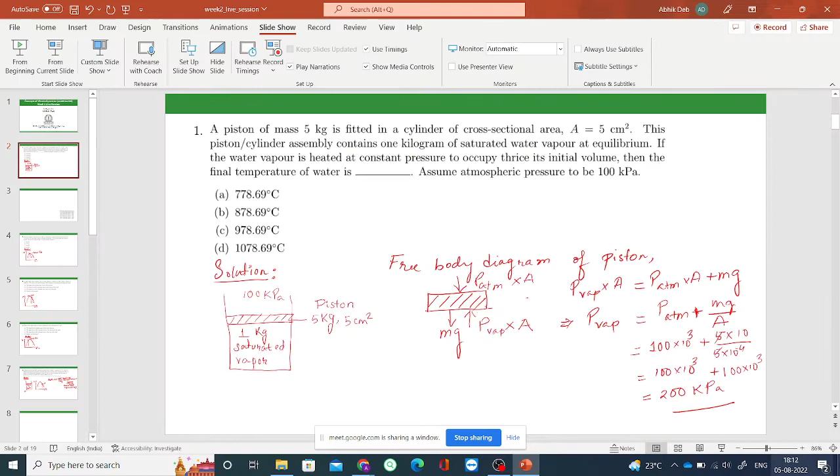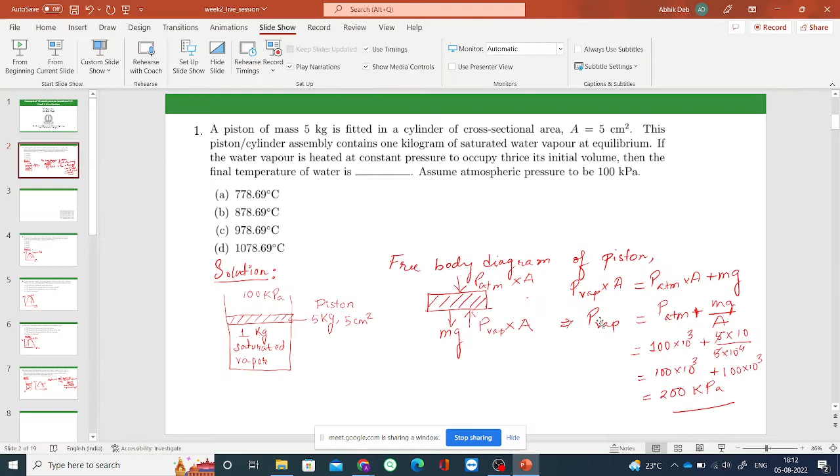So the net pressure inside will be actually 200, this is 200 kPa. So, see, in this only saturated vapor is present, right? So there is no liquid. So the pressure inside the piston cylinder, which is being exerted on the piston, is actually solely due to the saturated vapor that is inside.

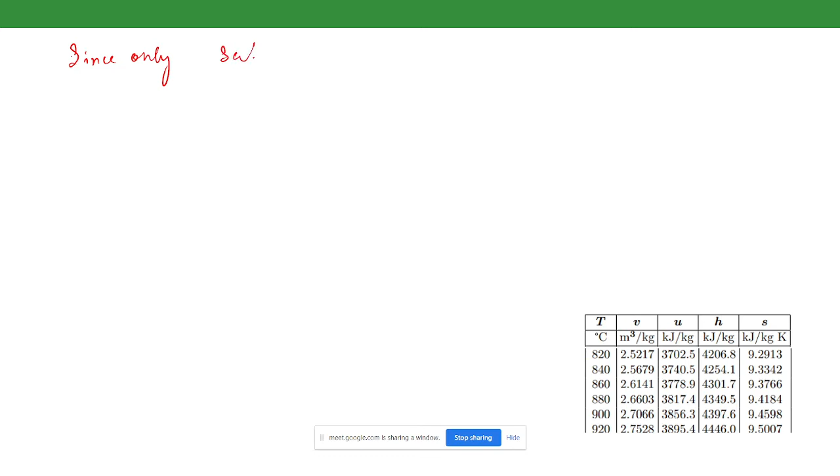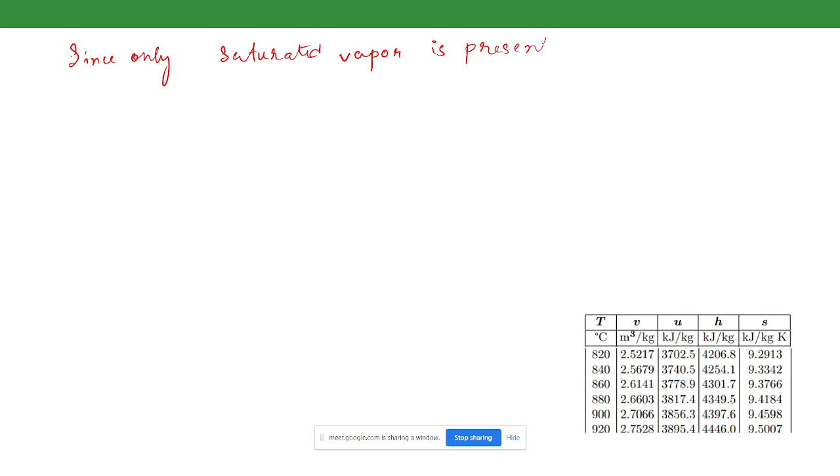So we can say that in this condition, since only saturated vapor is present, this saturation pressure will be equal to the vapor pressure that we have found, and that becomes equal to 200 kPa. Now corresponding to this saturation pressure, from the steam table we can find out the specific volume of the gas. Since this is only vapor, only the specific volume of the gas will come.

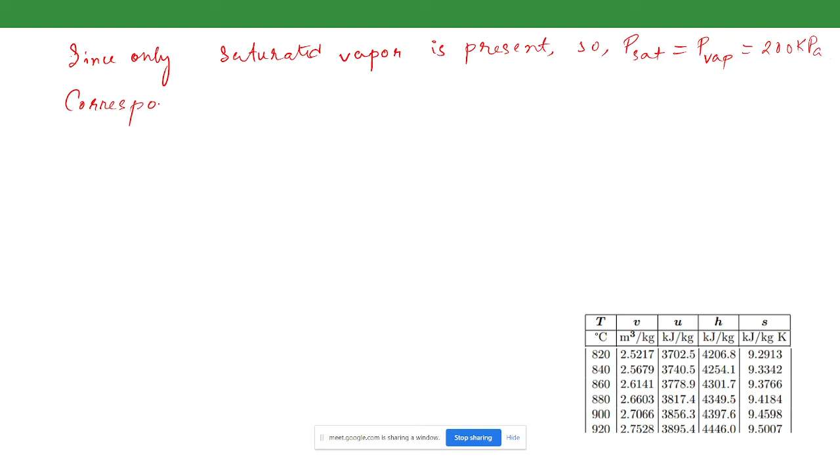So corresponding to P saturation equals 200 kPa, the specific volume of the gas, from the steam table, I am directly writing the value here, will be equal to 0.88568. Since only vapor is present, this will be equal to the specific volume of the entire mixture. So in stage 1, the specific volume of the mixture will also be equal to this one.

Now see, the piston cylinder assembly is a closed system. So for a closed system, the mass is constant. Since mass is constant, see, specific volume is volume by mass. In the question it is given that the water vapor is now heated at a constant pressure to occupy thrice its initial volume. So the volume is becoming thrice.

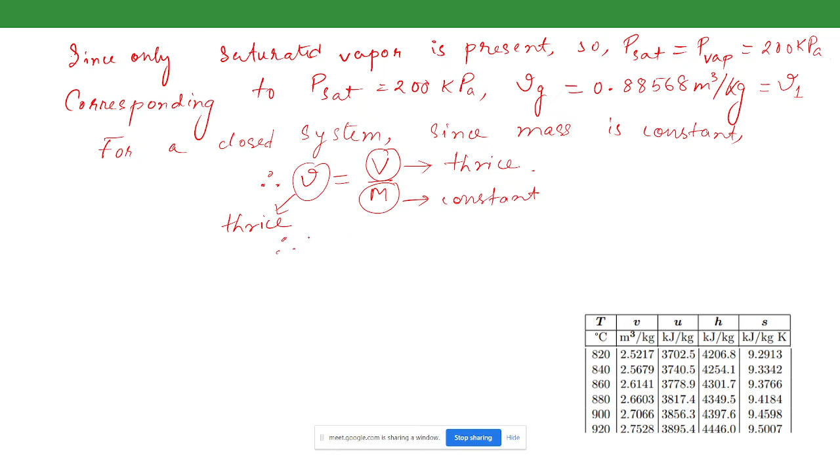So that implies that this value will also become thrice, right? Since the volume is becoming thrice and the mass is constant, the specific volume will also become thrice. So in stage 2 the specific volume is equal to 3 times the specific volume in stage 1, that is 3 multiplied by 0.88568, which becomes equal to 2.65704.

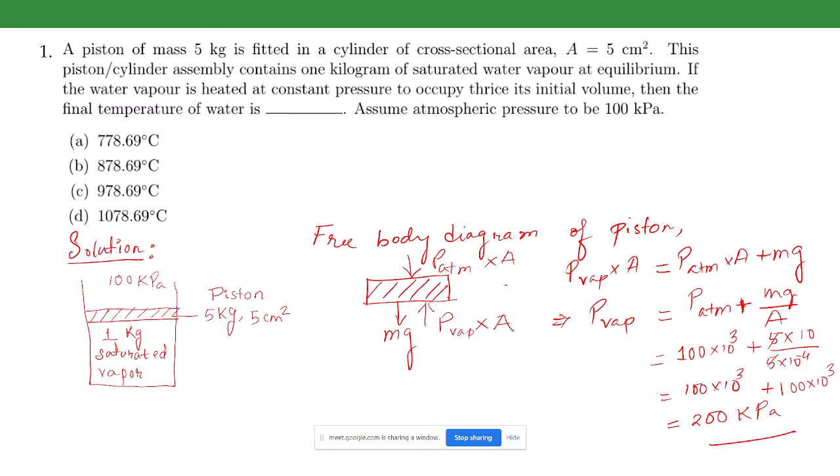Now we have to find the final temperature of water in this case. It was already in a saturated vapor stage. Now it is being further heated at a constant pressure, so it will come to the superheated vapor region. There, corresponding to this pressure, we have to find what temperature corresponds to this specific volume. From this section of the steam table, you can see that it lies between these two states, between 2.61 and 2.66.

So from the superheated vapor table, we have to find T2. Since there is no direct value, we have to do interpolation as usual. So T2 will be equal to, 880 minus 860, these are the temperature differences. Now we consider the ratio of the specific volumes, that is 2.65704 minus 2.6141, divided by the difference of the specific volumes corresponding to these two temperatures,

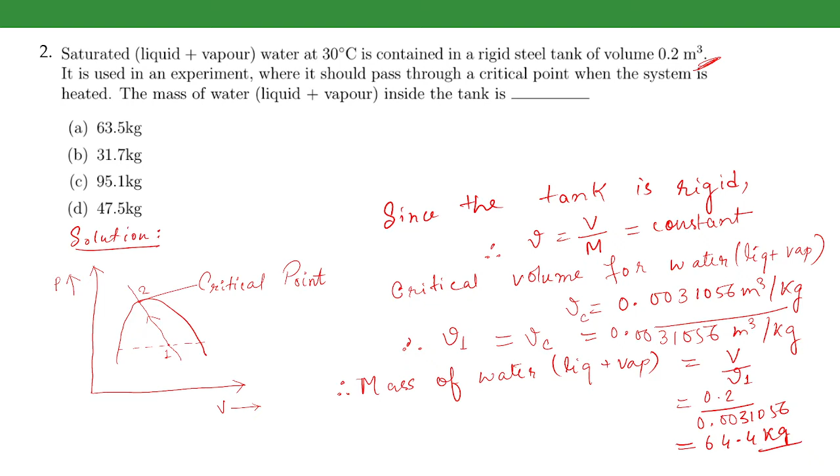There is a slight change in the value because the source from where I have taken this question probably used some other steam table. These slight changes are attributed to small differences in the steam table values from different sources. So the answer will be option A, 64.4 kg.

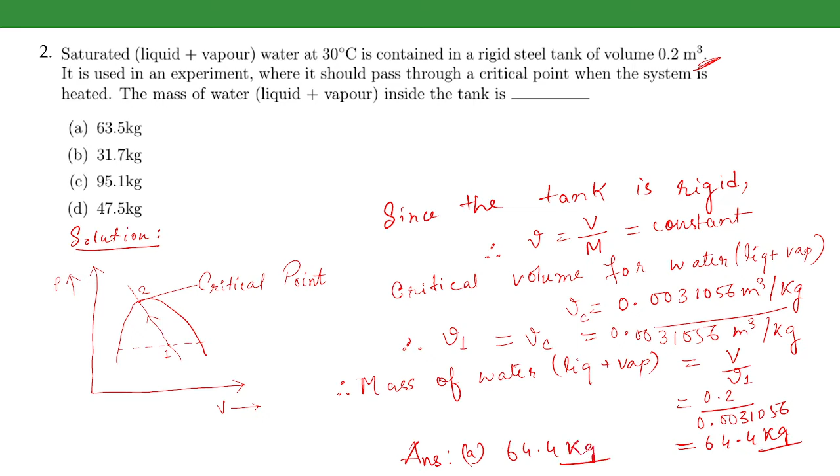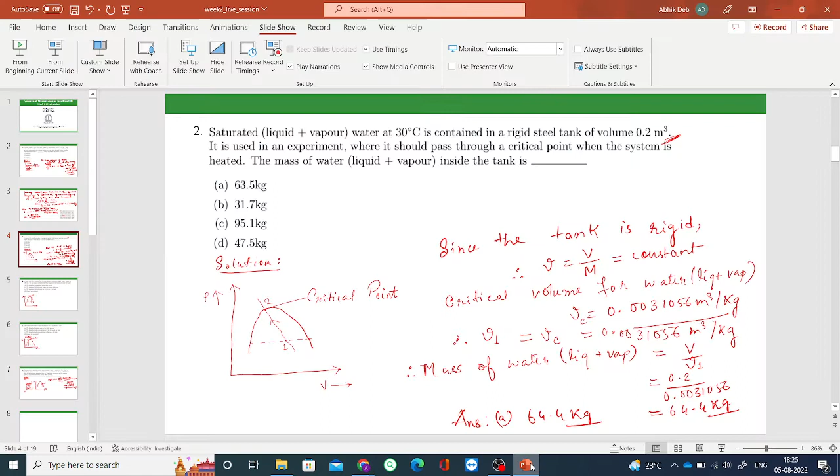So is it clear to everybody? Please do let me know. Yes, sir. Okay, no doubt, right? Yes, sir. Okay, so we will now move to the next problem.

Now, a sealed rigid tank contains 1 kg of water, liquid plus vapor, at 200 degrees Celsius with a volume of 0.005 meter cube. The tank is now slowly heated. What happens to the liquid level inside the tank? Four options are given: the liquid level remains the same in the entire process, the liquid level will eventually drop to the bottom of the tank, the liquid level will eventually rise to the top of the tank, and it cannot be determined.

So again we will make use of the fact that it is a sealed rigid container. Since it is sealed plus rigid, this implies the specific volume is constant. Let us suppose that the mixture is initially at stage 1, having a temperature of 200 degrees Celsius and a volume of 0.005 meter cube. Now it is being slowly heated.

Now there can actually be two instances. If point 1 lies to the left of the critical point, since the specific volume is constant while it is being heated, it will rise up a straight line parallel to the pressure axis. So if it is to the left of the critical point, what will happen? This is the liquid region, as we all know, and this is the vapor region.

So is this clear to everybody? Any doubt? Hello, sir. Sir, in this question, is the 200 degrees centigrade temperature surplus data? Sorry, I didn't get you, can you please repeat? Sir, I understood the question, and your answer is also correct. But the 200 degrees centigrade temperature is given. So is that surplus data, sir? Because we have not used this.

Yeah, we have not used this because it is essentially stating that the temperature is 200 degrees Celsius, which is below the critical point temperature, but it is not actually required to solve the problem. Okay. So anything else? Any more doubt?

Sir, again one thing: if the volume of the vapor is less than the critical point, then point one will come on the left side? Yes. So in that case, we will come to that. The next problem is actually related to that only. Let me see. It is visible, right? Okay, sir. So, the part that you were asking, we will be solving in this one.

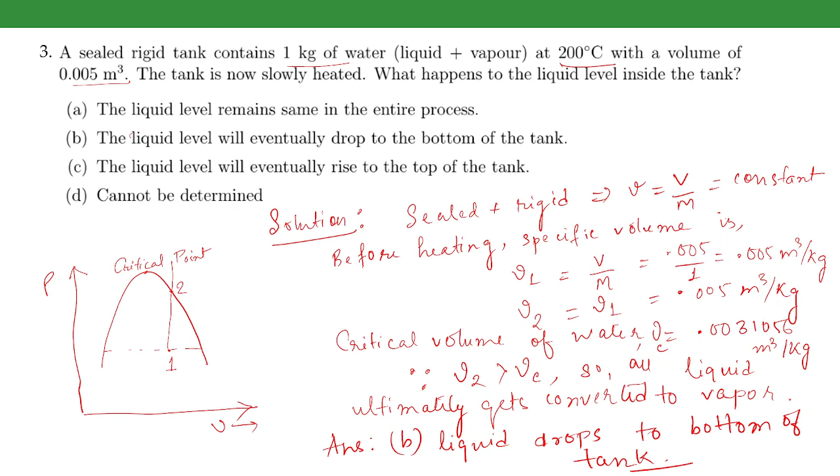So, in the previous problem, if the mass is now 2 kg of water mixture instead of 1 kg, what will be the specific volume? All the concepts remain the same here. So we can write that the specific volume of 2 is equal to the specific volume of 1, and that will be equal to 0.0025. Okay. So again the critical volume is the same, 0.0031056.

So here we can say that the final specific volume at stage 2 will be less than the critical volume. So when you heat it further, the entire mixture will turn into liquid. This happens essentially because the pressure at this point, see, these are the pressure lines, right? It moves like this. So the pressure becomes so high that they turn into a compressed liquid stage, in which the entire vapor at this level of high pressure will turn into liquid.

Thus, because of this, the entire mixture will become liquid. Therefore, the liquid level in this case will eventually rise to the top of the tank. Therefore, liquid level rises to the top of the tank. This is option number C.

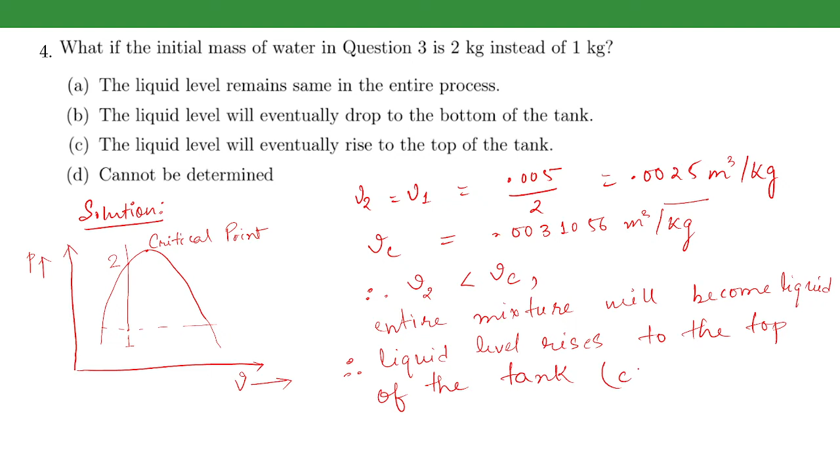So I hope that the question that you were asking, this answers the question. Yes. Yes, sir. Is it perfectly fine? Yes, sir. Okay. So, okay, so we will be moving on to the next problem right now.

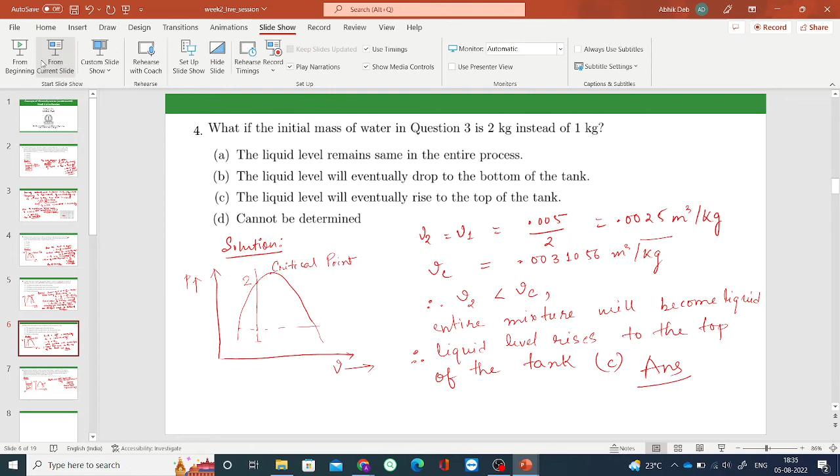So, since the piston movement is arrested, this implies that the piston cannot move outward. So essentially in this process, the volume inside will remain the same. Therefore, in this heating process till 150 degrees Celsius, it will be essentially a constant volume process. And after this, the pin is removed and the water is heated at a constant pressure till it reaches 300 degrees Celsius, that is stage 3.

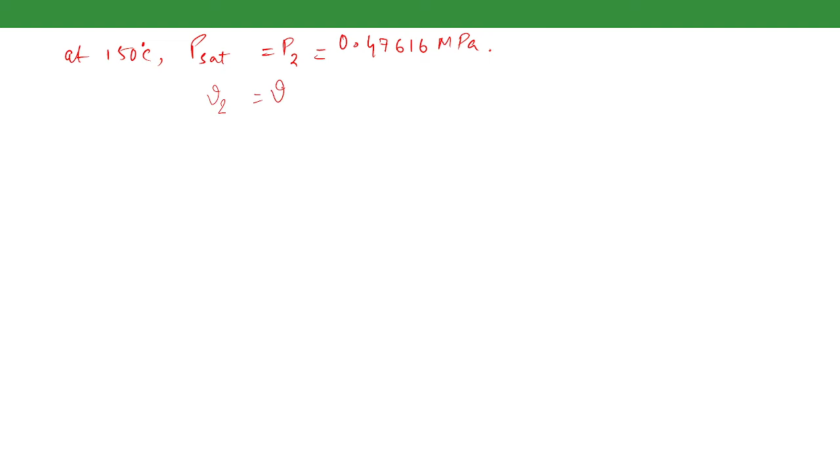And since it is on the saturated vapor line, the specific volume at stage 2 will be equal to the specific volume of the vapor phase at 150 degrees Celsius, and that is equal to 0.39245.

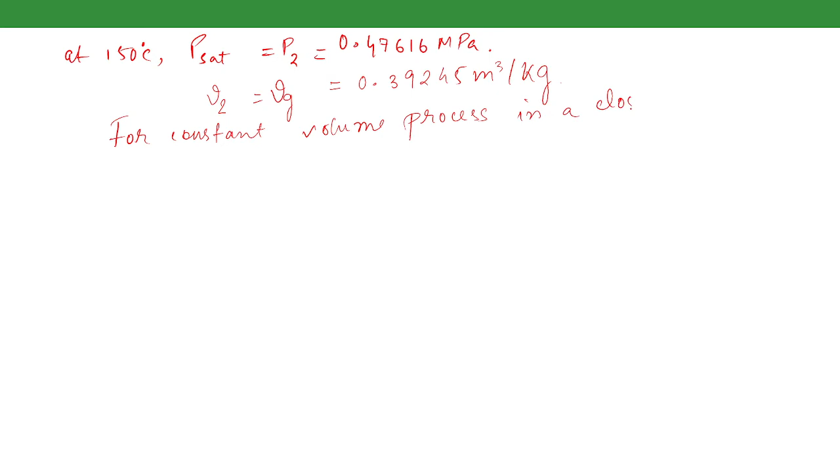Again, for a constant volume process in a closed system, the specific volume will remain constant, therefore v2 is equal to v1. This implies v1 is equal to 0.39245. So since stage 1 is within the liquid vapor dome, it will have a particular quality, that is, it will have both liquid and vapor.

So we can write this value as (1 minus x1) vf1 plus x1 vg1 equals 0.39245, and from here if we put the values of vf1 and vg1, we will find that x1 comes out equal to 0.0948. Here we have been asked to find the initial quality of the mixture. Therefore initial quality of the mixture is 0.0948. So this is the answer to part A.

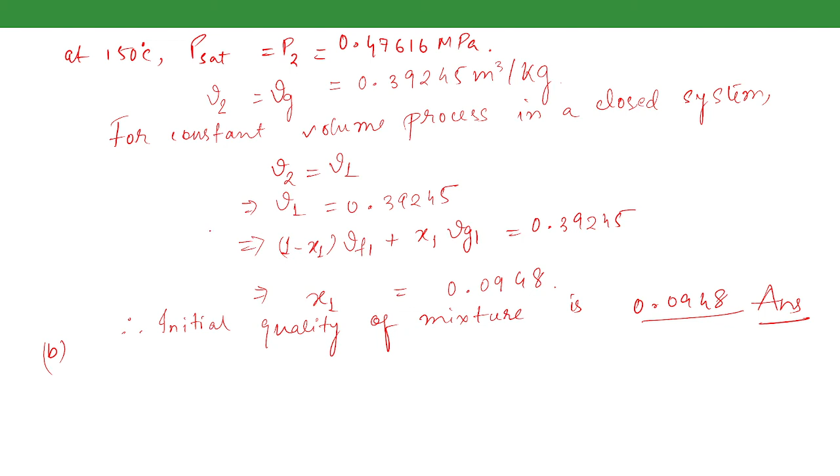We have been asked to find the final specific volume of the water vapor. For the final specific volume, this is stage 3. Stage 3 is essentially in the superheated vapor region. Since 2 to 3 is a constant pressure process, the pressure at stage 3 will be equal to the pressure at stage 2, that is P3 equals P2, equal to 0.47616 MPa.

Is there any problem? Any doubt?

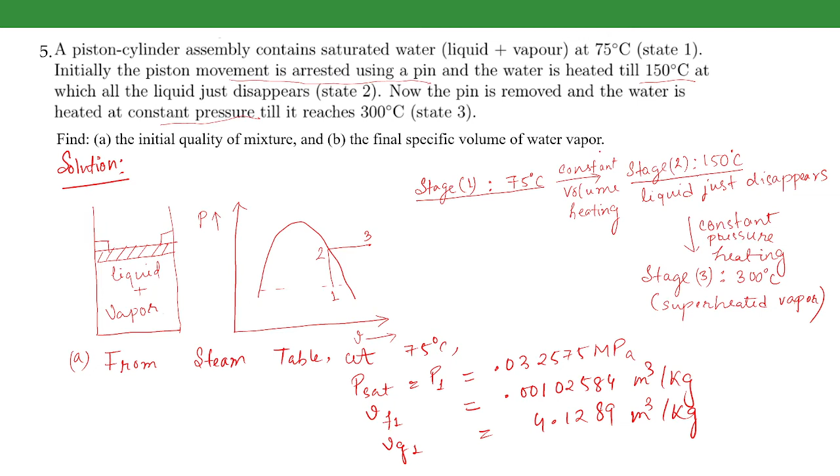It is given that stage 3 is at 300 degrees Celsius. So from the steam table, at 300 degrees Celsius, we have to find the final specific volume of the water vapor corresponding to this pressure. But this pressure is not directly available in the steam table, so we have to do an interpolation. At 300 degrees Celsius, corresponding to

0.45 MPa, the specific volume, there is no Vf and Vg. It is completely vapor, in the superheated vapor region, so we will denote it by V only. That becomes equal to 0.58140, and corresponding to 0.5 MPa, the specific volume will be equal to 0.52261.

So between these two pressure points this will lie. If we do the interpolation, we can find the specific volume corresponding to stage 3. That will be 0.58140 plus these values from the steam table, with the ratio of the corresponding pressure values. This is just a calculation; it will come out to be 0.5506. So this is the final specific volume.

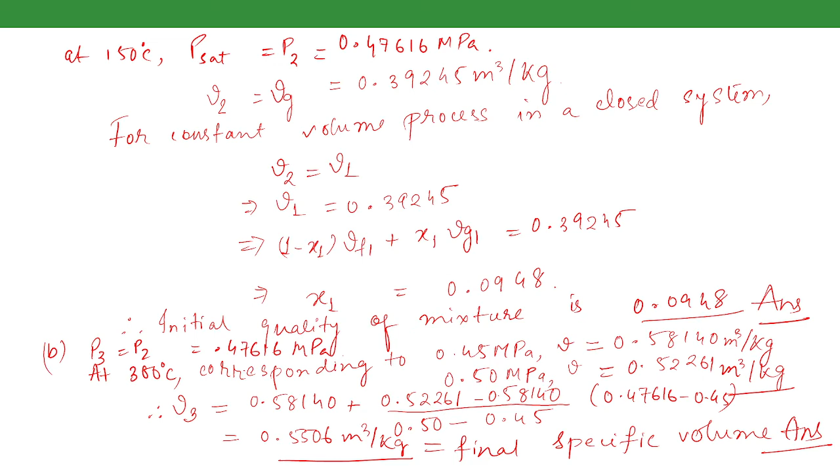Okay, so is it clear to everybody? Any doubt? Any doubt? If there is no doubt, then we can move on to the next problem.

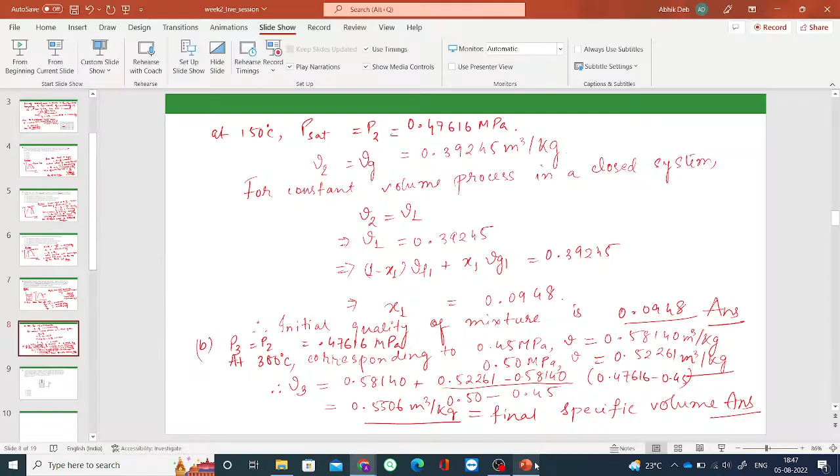A 20 kg piston in a cylinder, a piston cylinder arrangement, with piston diameter 200 millimeter, is loaded with a linear spring and the outside atmospheric pressure of 100 kilopascal. What is a linear spring? Can you tell me what a linear spring is, anybody? Anybody?

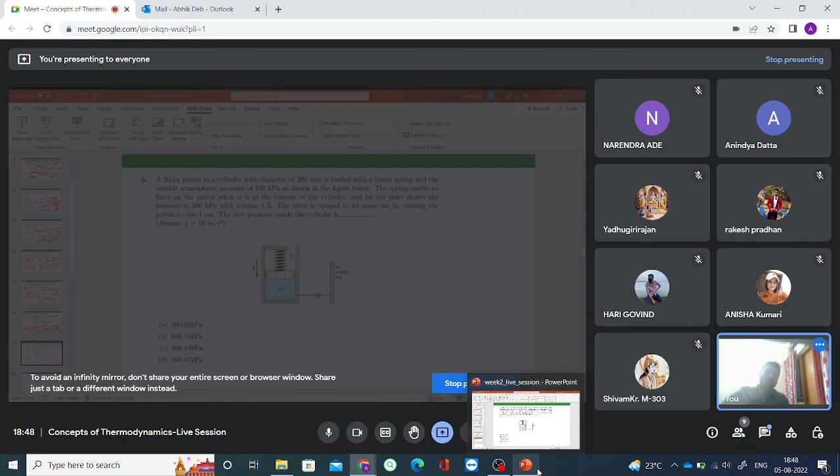Okay, just a minute. What is a linear spring? A linear spring is one in which the force exerted by the spring varies linearly with the compression or expansion of the spring. It is a linear function. When the spring becomes compressed, it will exert a force, and this force will vary linearly with the displacement of the spring.

It is stated that the spring exerts no force on the piston when it is at the bottom. So the spring is relaxed when the piston is at the bottom. State 1, shown in the figure, has a volume of 1 liter and a pressure of 300 kilopascal. Now the valve is opened to let some air in from the supply, and the piston rises 1 centimeter. We have to determine the new pressure inside the cylinder.

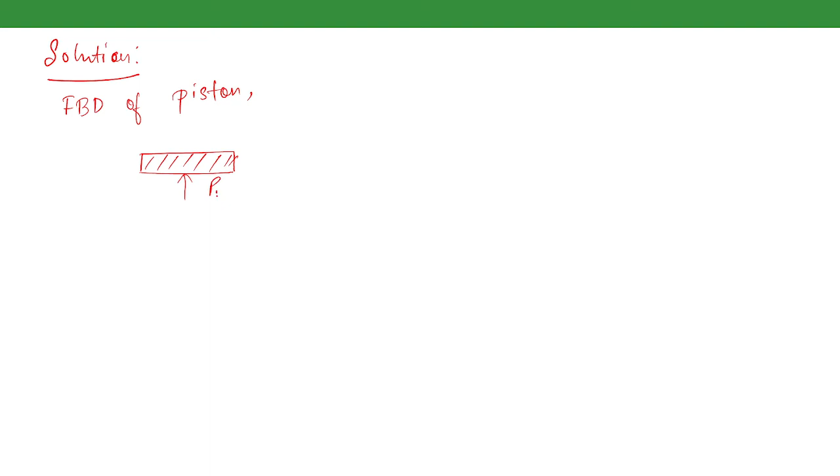So let us start with the solution. Let us first draw a free body diagram of the piston. So there will be pressure from inside. We can write it as: this is the force, this is the weight of the piston, this is the atmospheric pressure force, that is, the force due to atmospheric pressure.

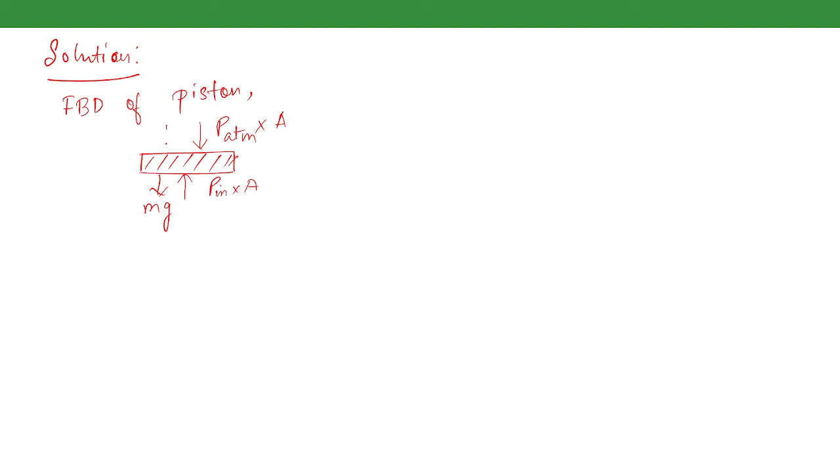And in addition to these, since this is not the relaxed length of the spring, there will be a spring force. It is stated that the spring exerts no force on the piston when it is at the bottom. So when it is at the bottom there will be no force, but when it is compressed there will be a force from the spring on the piston. So let us suppose that this is the spring force, which we are assuming as Fs.

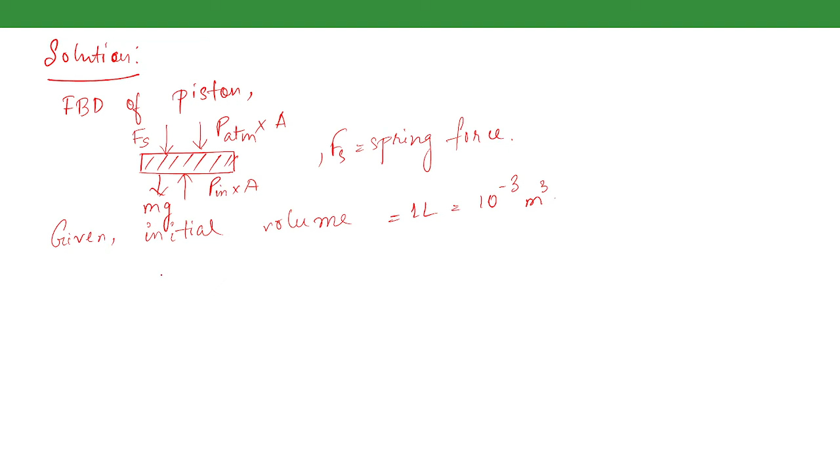Now it is given that initial volume is equal to 1 liter, that is 10 to the power minus 3 meter cube. Diameter of the piston is given as 200 millimeter. So this volume is essentially the area of this piston multiplied by this displacement. So to find this displacement, we can divide this volume by the area of the piston to find what displacement has happened till stage 1.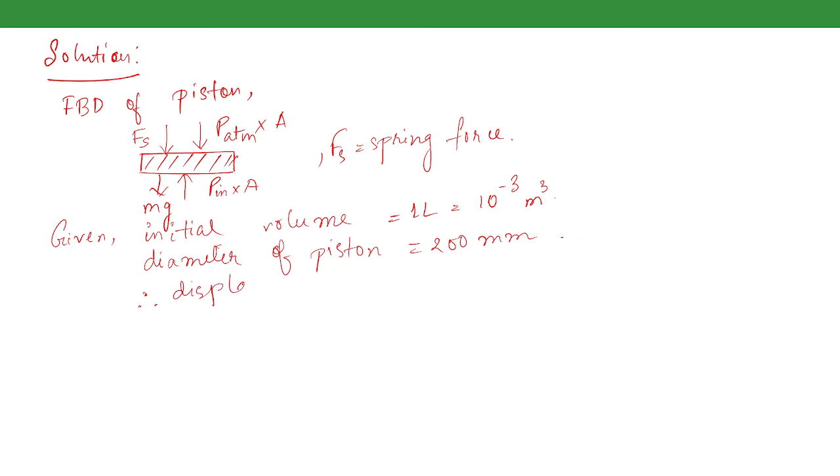So displacement of spring in stage 1, x1, will be equal to volume by area. So 10 to the power minus 3 divided by the area; 200 millimeter is 0.2 meter, so 0.2 whole square. This comes out equal to 0.0318 meters or 3.18 centimeter.

Now if we consider this free body diagram and do a force balance, what can we say? From force balance, these are the upward forces. Fs, atmospheric pressure force, and the weight of the piston are all downward forces, that is they act downward. So the spring force can essentially be written as

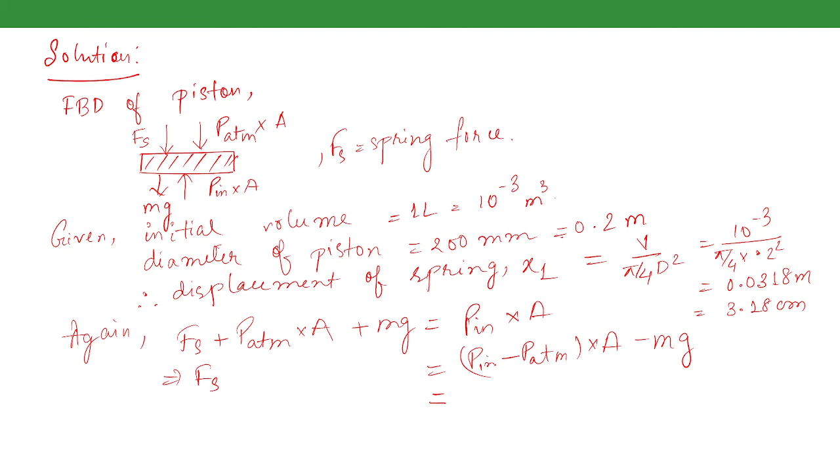what is the inside pressure? The pressure inside the cylinder in stage 1 is given as 300 kilopascal and the atmospheric pressure is given as 100 kilopascal. So we can directly write 300 minus 100, and since it is in kilopascal we multiply it with 10 to the power 3, times the area, pi by 4 into 0.2 square, minus the weight. This is a 20 kg piston, so 20 into 10. If we do the calculation, it comes out to be 6083.18 Newton.

So is it clear till now? If yes, then we will move on to the next part. Can anybody just unmute and let me know if it is clear?

Sir, in the free body diagram, spring force will act in a downward direction? Yes. By the pressure of the fluid, it moves in the upward direction. Yes. So the spring gets compressed. Yeah, see, when the spring is in its natural length, it is completely in a relaxed position. Now if you are forcing it upward due to the pressure of the air, what will be the reaction of the spring? The spring will try to push it downward, and hence the spring force will act downward.

Okay. If it had been the opposite, like if it was pulling it, then it would have been extended. Then the natural tendency of the spring will be to pull it back. So the spring force in that case will act upward. So means sir, it acts opposite to the direction of the compression.

See, the spring, anybody, it will try to reach its equilibrium position, right? In which it was in its natural state, you can say. So when it is compressed, for it to get back to its natural state, what will happen? It will have to force the piston downward, and hence to resist this compression, it will exert a force in the downward direction.

Okay. Okay, sir. Thank you, sir.

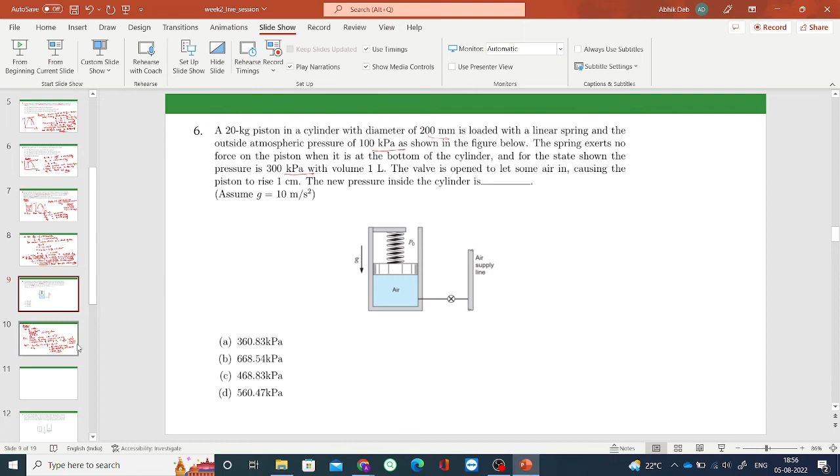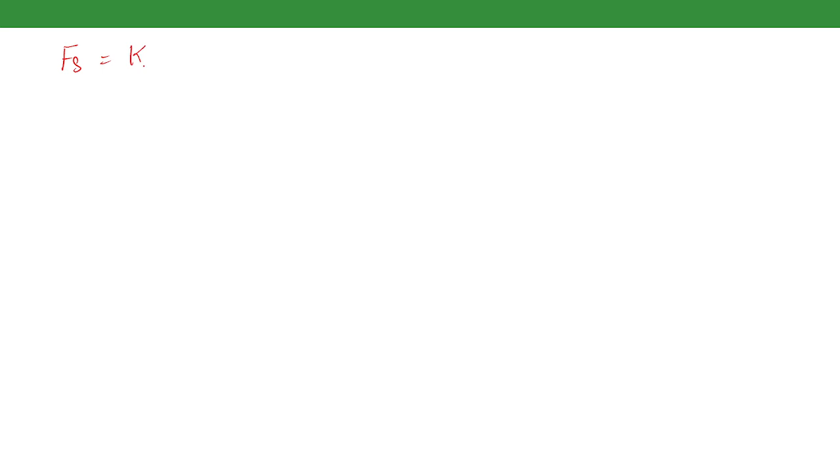Okay. So now we will move on to the next part. As I initially stated, what is a linear spring? A linear spring is one in which the spring force varies linearly with the displacement. So for a linear spring, the spring force is equal to K multiplied by X. You know this K, right? This is the spring constant.

So as x increases, this is the displacement of the spring. There is either compression or expansion of the spring, and there will be a linear variation of the spring force due to this. So from this, we know this one, right? x1 is the initial displacement of the spring till stage 1. So if we divide it, we will find the value of the spring constant. So this comes out equal to 191294.97 Newton per meter.

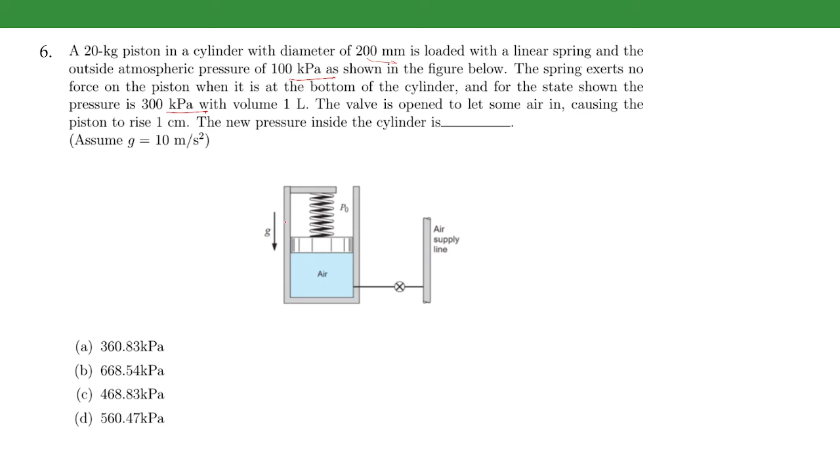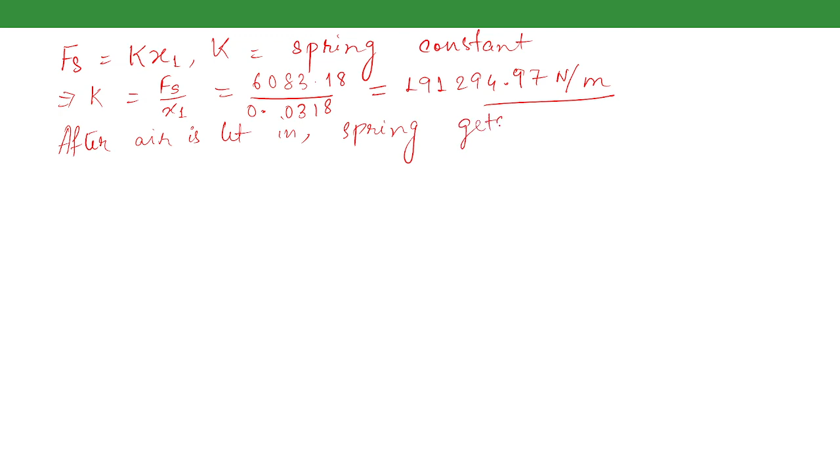Now in stage 2, what happens? The air is let into this volume by the supply line. So naturally the spring will be further compressed, as it is stated that the piston rises by 1 centimeter. So after air is let in, the spring gets compressed by a further 1 centimeter. Therefore the final displacement of the spring, that is the compression of the spring, will be 3.18 plus 1, that is 4.18 centimeter, that is 0.0418 meters.

So the new spring force will be what? This was stage 1. The new spring force will be K multiplied by x2. The spring constant will remain constant. So 191294.97 multiplied by this value. So the new spring force comes out to be equal to this one. See, the spring force has increased to around 8,000. As we are compressing the spring more and more, it will exert a higher value of spring force to oppose it, and this force is increasing linearly, and hence it is a linear spring.

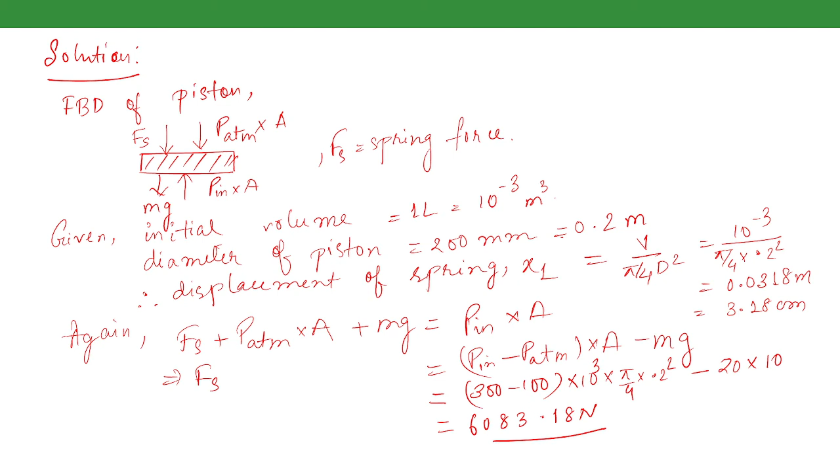So now if we apply the force balance on the piston, the forces will all act in the same direction as before. So Fs2 plus mg plus atmospheric pressure multiplied by area will be the internal pressure in stage 2 multiplied by area. So the pressure inside the cylinder in stage 2 will be equal to the atmospheric pressure plus the spring force and the weight divided by the area.

So the atmospheric pressure is 100 kilopascal and the spring force is 7996.12, plus the weight of the piston. The mass of the piston is 20 kg, so the weight will be 20 multiplied by 10, and the area will be pi by 4 multiplied by 0.2 square. So it comes out to 100 into 10 to the power 3 plus 260.89 into 10 to the power 3. So the net pressure comes out to be 360.89 kPa.

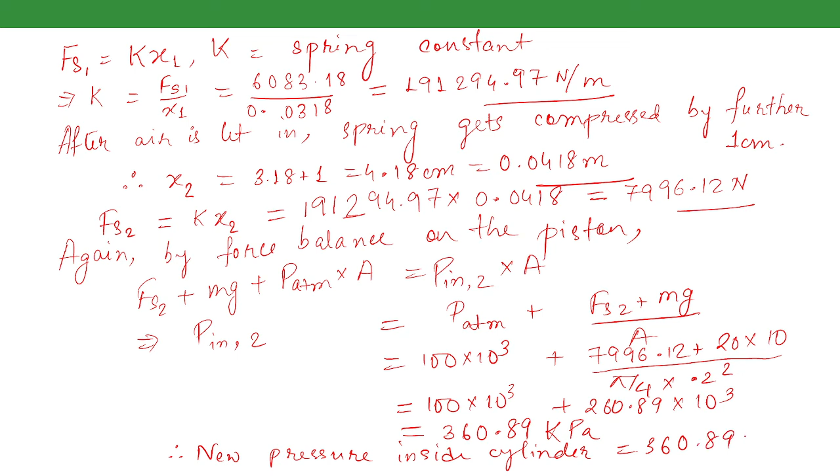Okay, so this is option A. So the new pressure inside the cylinder is equal to 360.89 kPa. This is option A. So is the solution clear to everybody?

Yes, sir. Okay, so let us then move on to the next problem. A 2 meter cube rigid tank having air at 150 kilopascal and ambient temperature 300 Kelvin is connected by a valve to a piston cylinder assembly as shown in the figure. The piston of area 0.1 meter square requires 300 kilopascal below it to float. That means the pressure needed to balance the weight of the piston and the atmospheric pressure so that it will start rising is 300 kilopascal. Only if the pressure below equals 300 kilopascal will it balance the weight and atmospheric pressure to make it rise.

Okay, now the valve is opened and the piston is allowed to move up slowly, and then the valve is closed. During this process the air temperature will remain constant at 300 Kelvin. If the final pressure inside the tank is 120 kPa, then we have to determine the height through which the piston has risen.

So what is essentially given here? This is a rigid tank. From here the air is allowed to move into this cylinder. Now after a final state of 120 kPa in the tank, we have to find out to what height this piston has risen in this cylinder. Okay, so let us start with the solution.

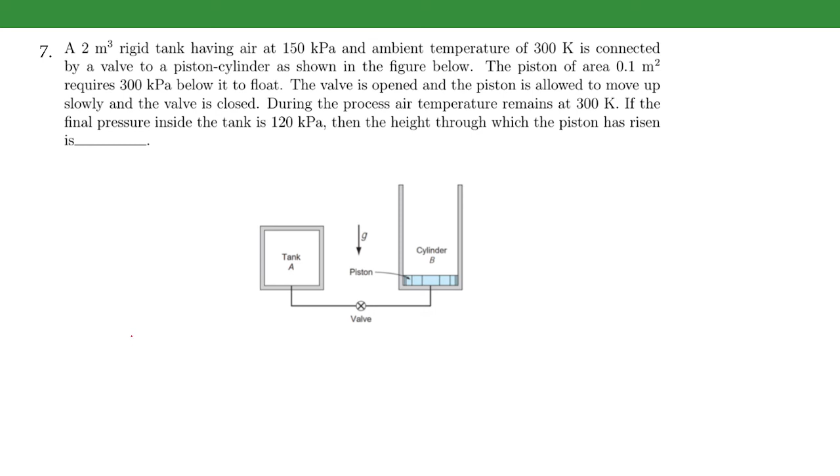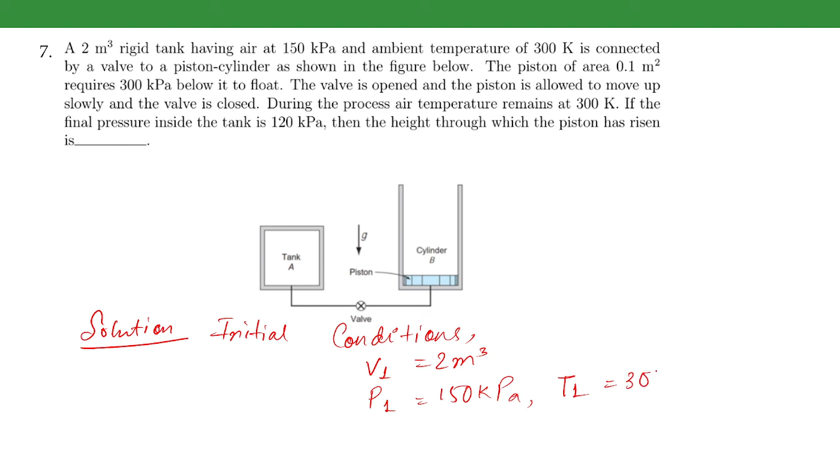So the initial conditions are: the volume of the tank is 2 meter cube. This is a rigid tank. And the pressure is 150 kilopascal, and the temperature is 300 Kelvin. So if we consider air at this pressure and temperature to be an ideal gas, and if we apply the ideal gas equation, then this is the mass of the air at the initial stage before the valve is opened.

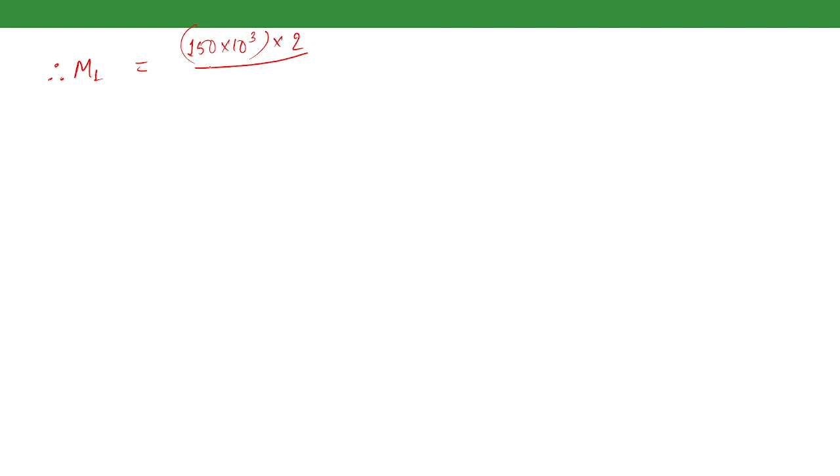So this implies the mass of the air inside the rigid tank, not the cylinder, will be at T1. Therefore what is the mass? P1 is 150 kilopascal, temperature is 300 Kelvin, and volume is 2 meter cube. So let me put the values. This is 150 into 10 to the power 3 multiplied by 2 divided by 300 Kelvin and R. So it will come out to be equal to 1000 by R, and we are keeping it that way for now.

Now the valve is opened and the air from this tank will now flow to the cylinder. We will consider two aspects now. First we will consider the tank after the valve is opened, and then we will consider the cylinder. For the tank, when the valve is opened, the air temperature remains constant at 300 Kelvin, but the pressure inside the tank drops to 120 kPa. And the volume is the same because it is a rigid tank.

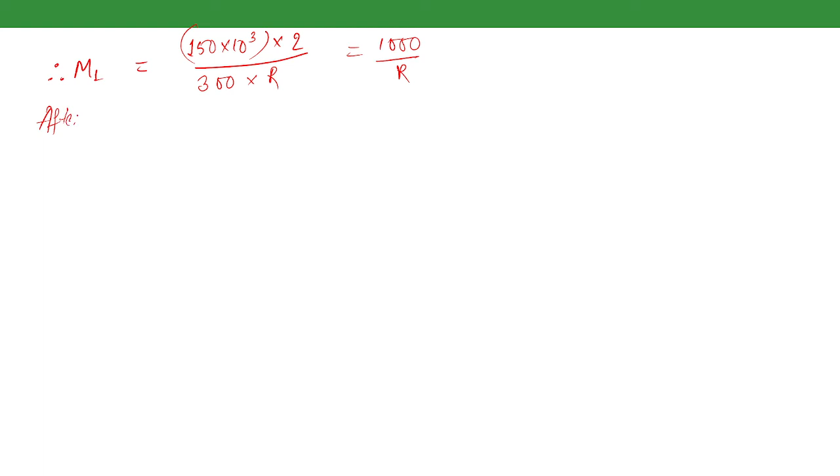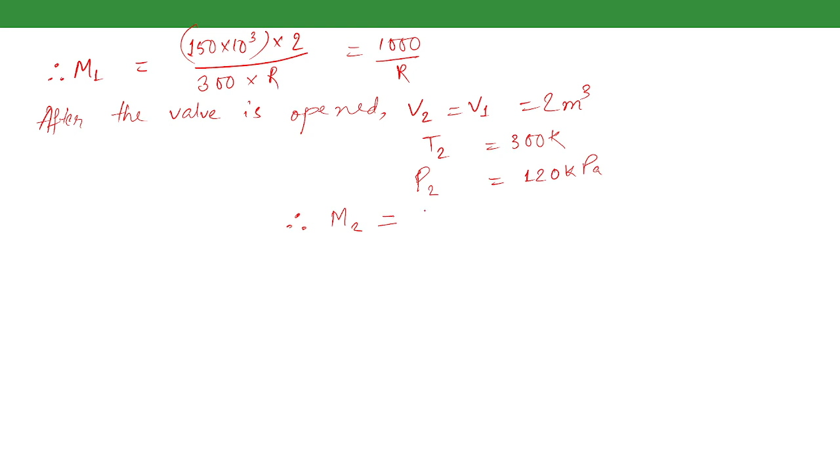So after the valve is opened, the volume is the same, the temperature is also 300 Kelvin, but the pressure now has dropped to 120 kPa. Therefore, under these conditions, there will be a particular value for the mass remaining in the tank, because some mass has already flown out of the valve into the cylinder. The mass remaining in the tank can be found from stage 2 as P2V2 by RT2.

So we will just put in the values. This comes out equal to 800 by R. So initially the mass inside the tank is M1, and after the valve is open, the mass remaining in the tank is M2. So what mass has left the tank? That will be the difference between these two masses.

Therefore the mass of air that has left the tank, let us say delta M, will be equal to M1 minus M2, that is 200 by R.

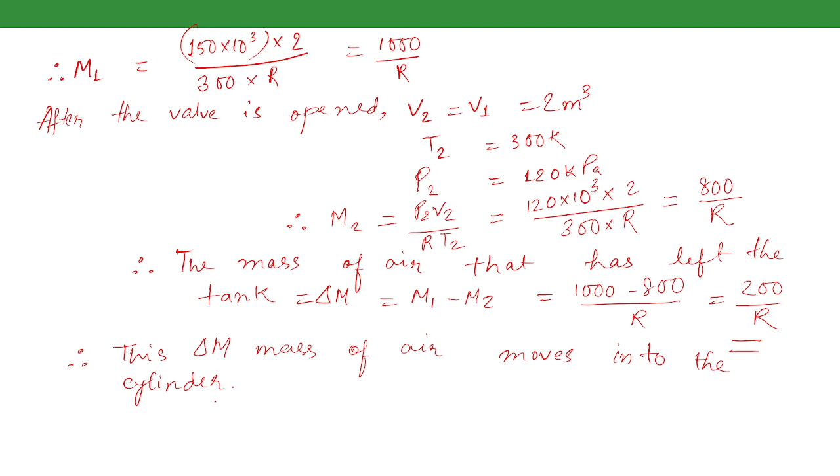So the mass that has left the tank will essentially be the mass that has entered this cylinder through the valve. Therefore, this delta M mass of air moves into the cylinder. So the mass of the air inside the cylinder is delta M, and that becomes equal to 200 by R.

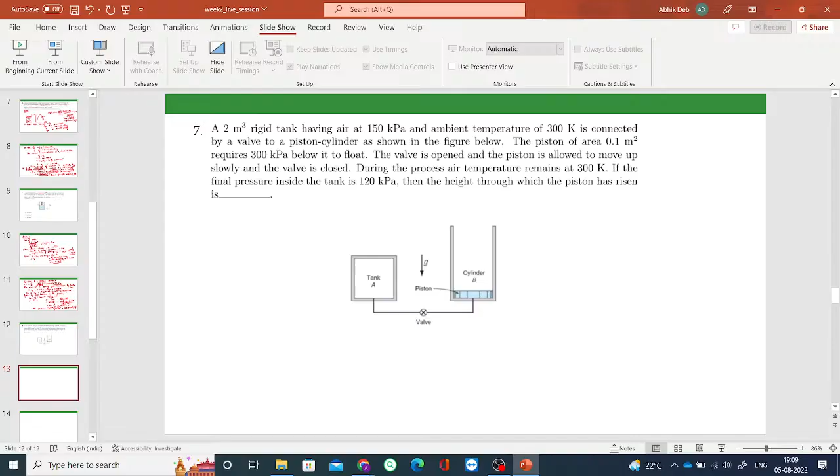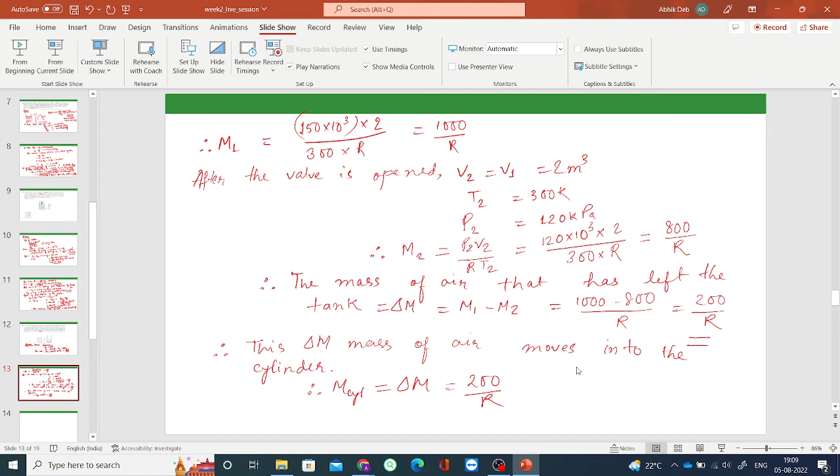Is it clear to everybody till now? Is it clear to everybody? Yes, sir. Okay. So let us move on to the next part now. Now what happens inside the cylinder?

The mass of air inside the cylinder we have determined from the difference of the masses, and it is stated that the piston is moving up, and we have to determine the height. So since it is moving up, we can say that it has started to float, and the pressure required for it to float is 300 kPa, right? So since it is floating, we can consider that the pressure inside the cylinder has attained this value of 300 kPa, and that is why it is moving up.

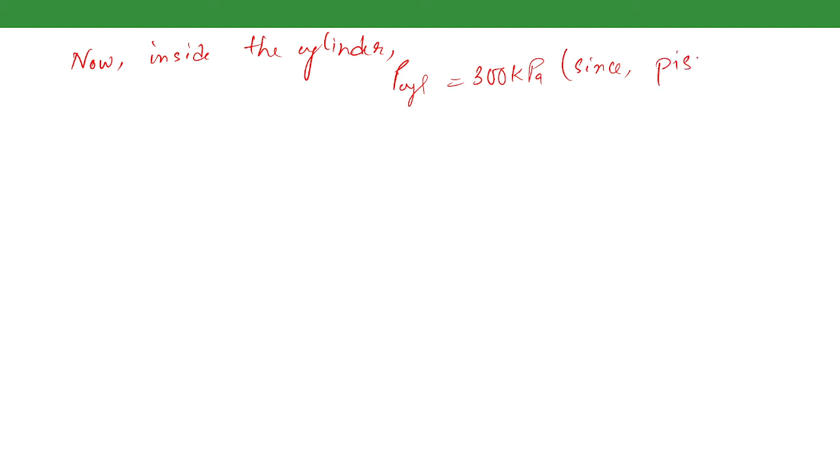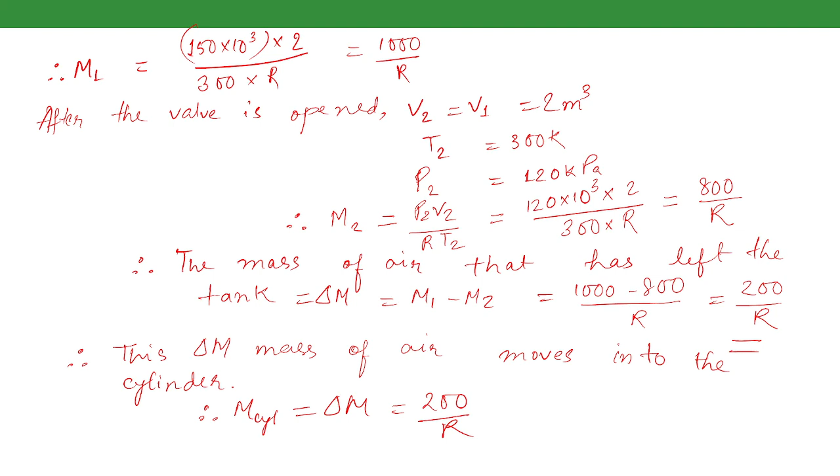Okay, so the pressure inside the cylinder is 300 kPa, since the piston is moving up. Now the mass of air inside the cylinder we have already determined. And the temperature? The temperature during the entire process, it is stated that the temperature of air remains constant at 300 Kelvin. So the temperature of air inside the cylinder is also 300 Kelvin.

So if we use the ideal gas equation again, we can determine the volume of the air inside the cylinder under these conditions. The mass is 200 by R, we multiply it with R, the temperature is 300 and the pressure is 300 into 10 to the power 3. That is why we didn't put the value of R, because it will ultimately get cancelled. So the volume of the air inside the cylinder comes out to be 0.2 meter cube.

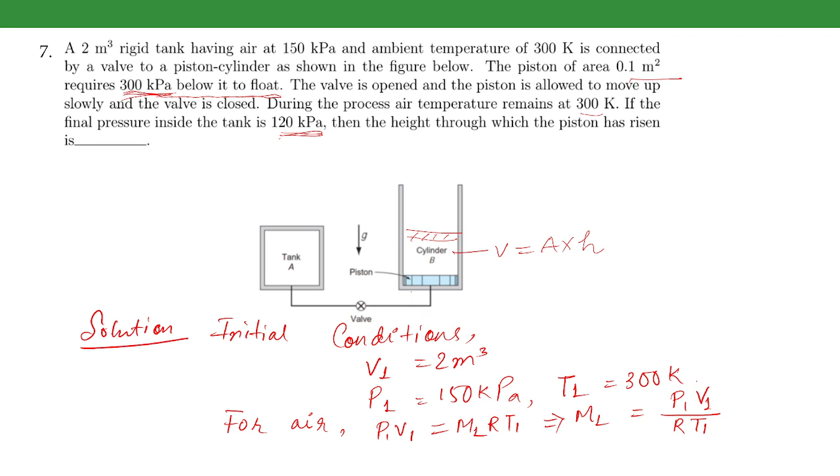Okay, now what is the area of the piston? The area of the piston is given as 0.1 meter square. So area of piston, 0.1 meter square. Now, since the piston has risen to this level, this volume will become equal to the area multiplied by the height through which it has risen. So if we divide the volume by the area of the piston, we can determine to which height the piston has risen.

So therefore piston has risen by H equals to the volume of the cylinder by area of the piston, that is 0.2 by 0.1, that is 2 meters. So the height to which the piston has risen is 2 meters. Okay, so is it clear to all?

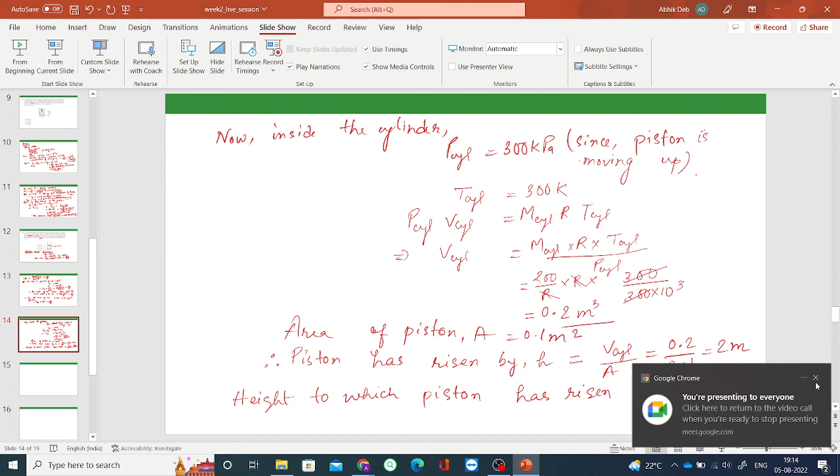Yeah, see, if the liquid is converting to vapor, then the liquid in the container is decreasing, right? So if it is decreasing, then the liquid level will drop. Okay, so does that answer your question? Okay, sir. It is clear now, sir.